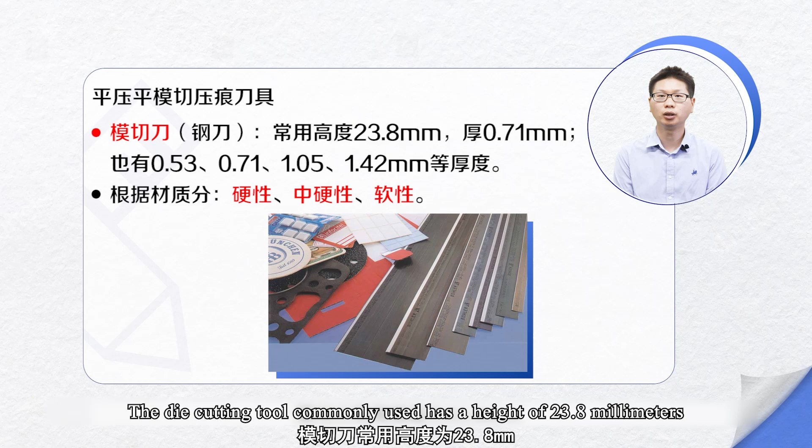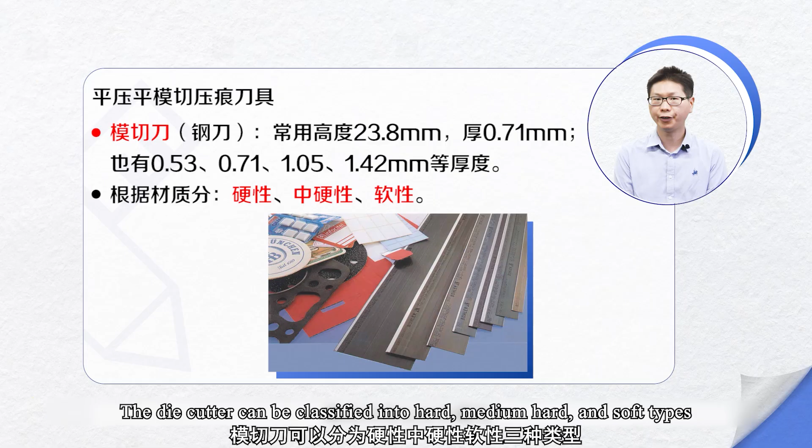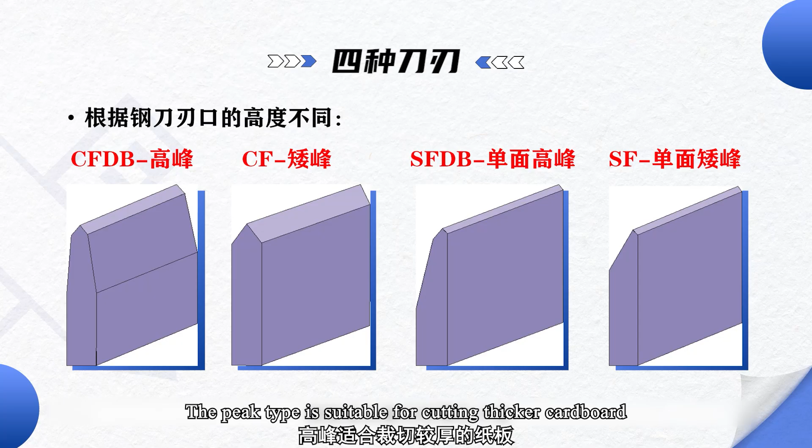The die cutter can be categorized into four types: high peak, low peak, single-sided high peak, and single-sided low peak, as shown in the figure. The peak type is suitable for cutting thicker cardboard, while the low peak type is suitable for cutting thinner cardboard.

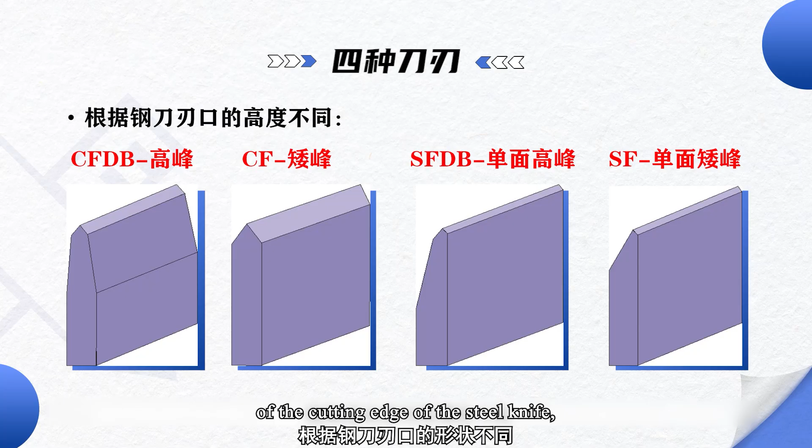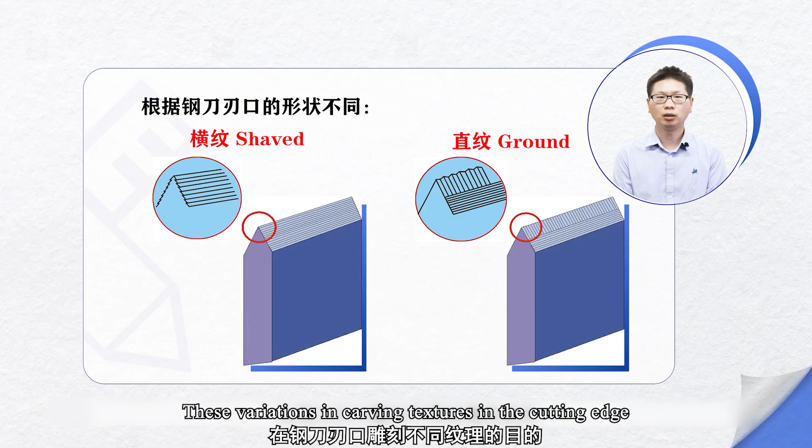Furthermore, based on the different shapes of the cutting edge of the steel knife, we have horizontal cutting edge steel knife, straight cutting edge steel knife, and ordinary cutting edge steel knife. These variations in carving textures in the cutting edge aim to reduce paper sticking to the knife plate.

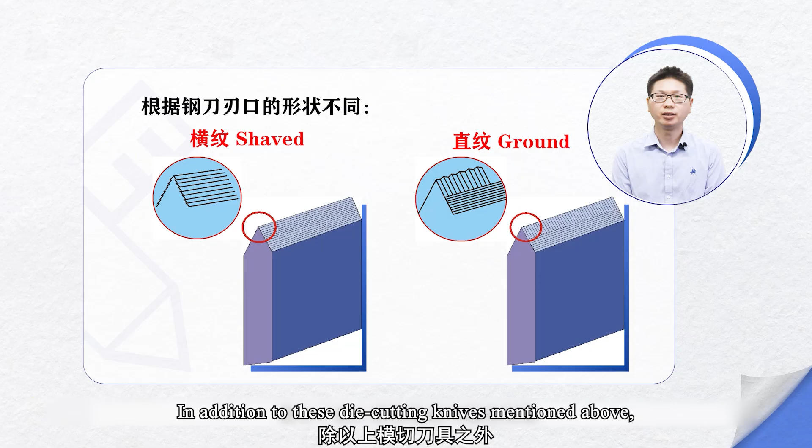The tear opening must ensure that the paper on the surface of the packaging box or bag does not crack and has a certain sealing effect, while also ensuring easy opening. In this case, a serrated steel knife is needed to cut a tear opening.

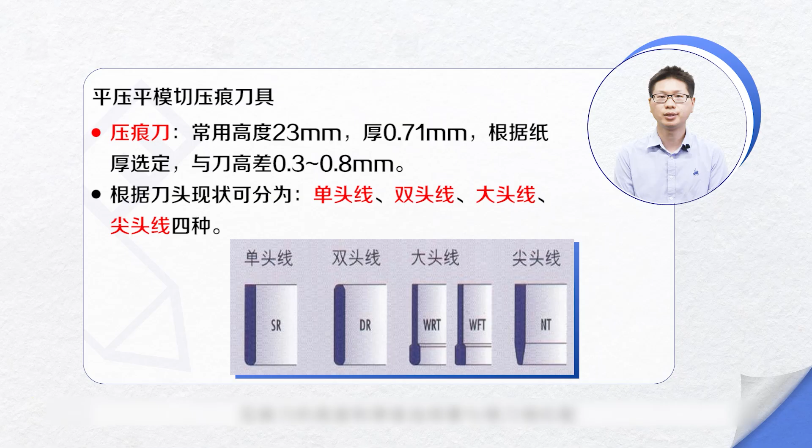Let's explore the flat stamping indentation knife together. The commonly used indentation knife has a height of 23 millimeters and a thickness of 0.71 millimeters, which is 0.3 to 0.8 millimeters shorter than the die-cutting knife. It's important to select an indentation knife with a height and thickness that matches the steel knife.

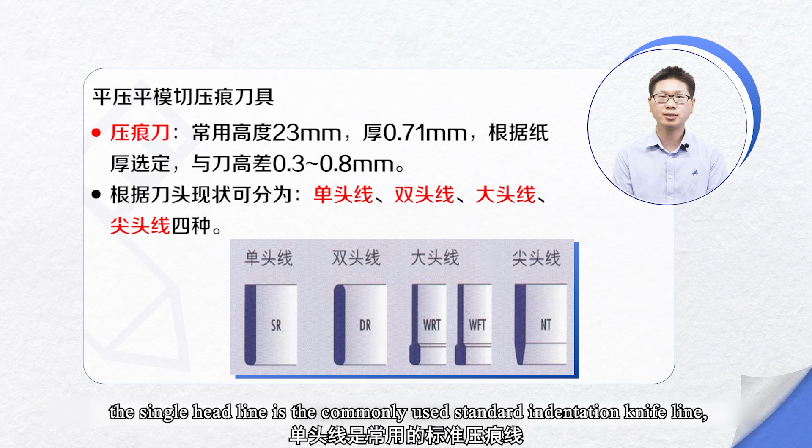The indentation knives can be categorized based on the tool head: single head line, double head line, big head line, and pointed head line. Among these, the single head line is the commonly used standard indentation knife line, while the double head line is the American standard indentation knife line. Now let's learn about the way to choose cutting tools.

As previously mentioned, cutters can be classified into three types of steel blades based on material properties: hard, soft, and medium hard. Hard steel blades have good wear resistance but poor elasticity with minimal forming bendability. They are suitable for high-volume processing of thick cardboard and simple-shaped products, such as circuit boards, rubber sheets, and plastics.

Soft steel blades are less wear-resistant but highly elastic, allowing significant forming bendability. They are ideal for small batch processing of thin paper and complex-shaped products, such as self-adhesive labels, greeting cards, and cardstock. Medium hard steel blades offer wear resistance and forming bendability between hard and soft blades, suitable for medium batch orders with moderately complex products.

Let's take a closer look at the round die-cutting indentation tool. This knife comes in two types. The first type is directly embedded in the metal cylinder, serving as a die-cutting indentation tool, as shown in the figure above. This die-cutting tool is highly durable and suitable for batch production, especially for large and simple-shaped products such as beer bottles and beverage bottle labels.

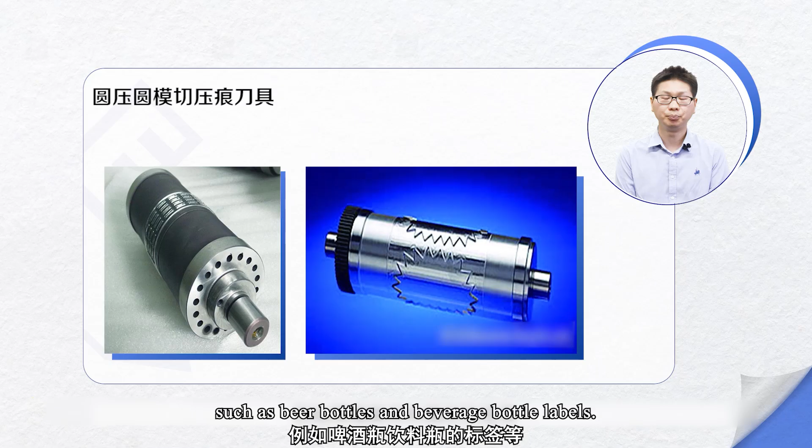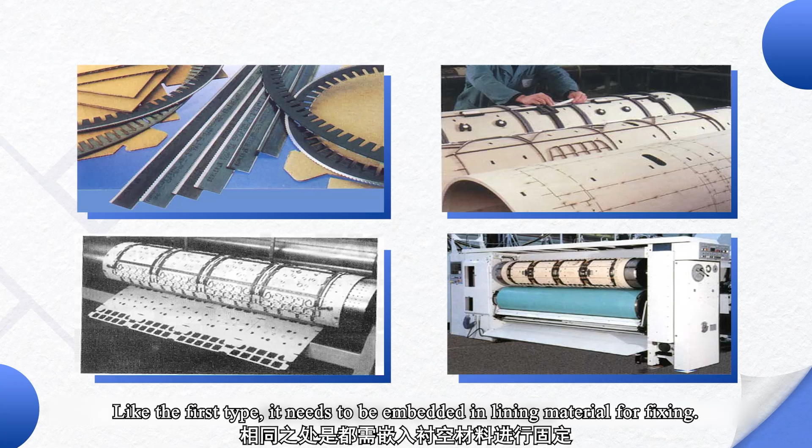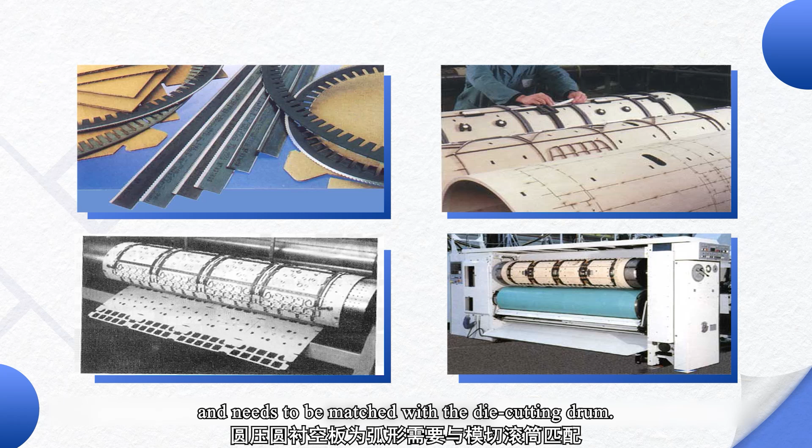The second type is a circular die-cutting indentation tool, which is similar to a flat cutting tool but with a curved shape. Like the first type, it needs to be embedded in lining material for fixing. Additionally, the circular lining plate is curved and needs to be matched with the die cutting drum. The lining plate is fixed on the die cutting drum by threaded connection.

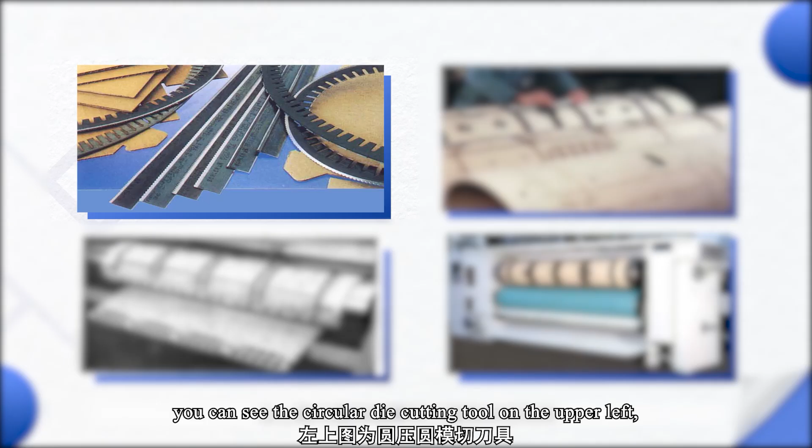In the image provided, you can see the circular die cutting tool on the upper left, while on the upper right are both the circular die cutting tool plate and lining material. On the lower right side of the image shows equipment after installation of the die cutting tool plate, and finally the lower left side shows the product from the trial cutting process. That concludes this lesson. Thank you all for your participation.